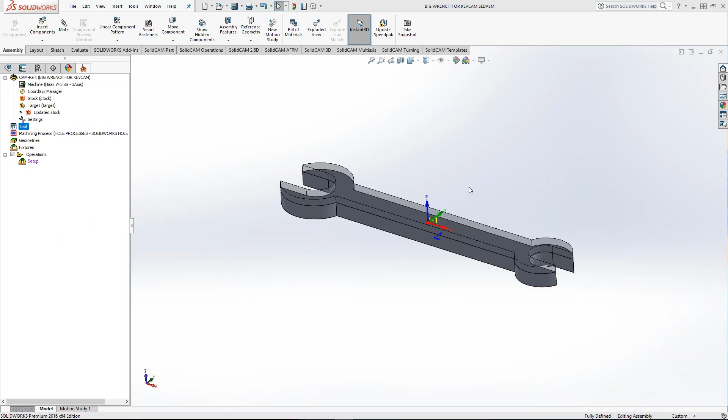Okay. So I didn't really want to face a square part, so I thought I'd come up with something a little funner, so I made up a big wrench. Added some stock to it, added a couple nubs to mill off on the back here. Of course, the standard setup, I think we've all been through this.

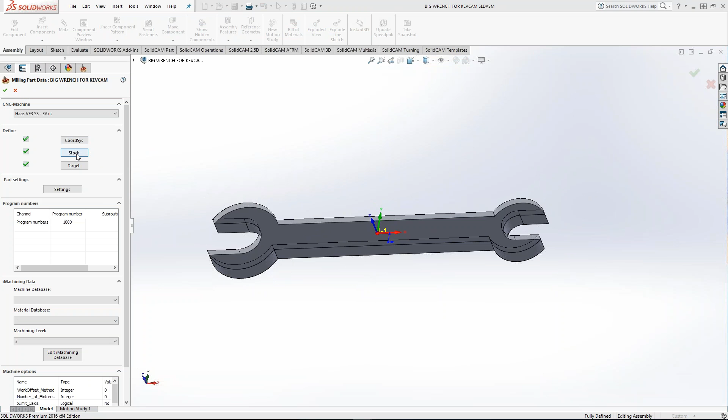This is kind of a different class. You set up your coordinate system. You define your stock. I like to model my stock up. You guys all know that. Target, of course, we've selected that. And today we're not going to be doing iMachining, so I'm not going to use iMachining.

And let me delete this probing. Kevin had asked me to do a probing operation on here, but I'm just going to skip that. That could be a different class as well. See if I can delete this guy now. Okay, so we're all starting from scratch. Got a coordinate system on here.

And there's a lot of things going on with face milling, to be honest. Back when I first started with SolidCAM, there was no face milling module. We either had to use profile or pocket and then manipulate the toolpaths to do what we wanted to. So in my opinion, I consider face milling what I call a canned operation, like the toolbox cycles, made easy for the user.

They're always open geometries, so you're not going to get a face mill operation to go up against the wall. In order to do that, you're going to have to use a profile strategy or a pocketing strategy. But there are very cool things going on with face milling.

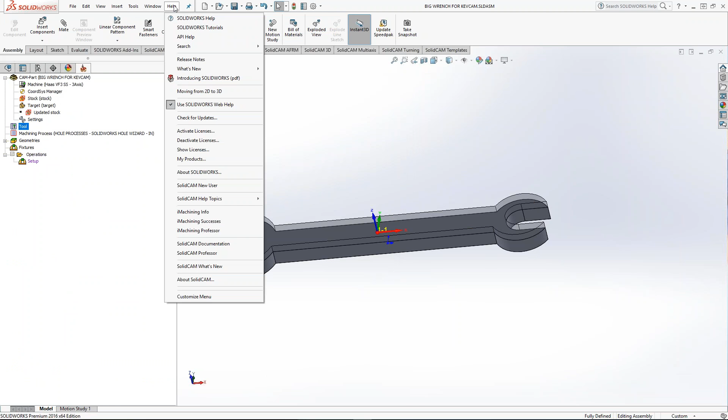One thing to keep in mind, and it's very helpful for even us application engineers at SolidCAM, is the help menu. The help menu covers every topic that there is in SolidCAM. So if you ever have a question, and I can show you guys how to get there, you just go to help. And if we go to SolidCAM help topics, we're going to go to milling.

And then what you do in here is you type in a phrase. Say we type in face milling. Then you're going to go ahead and select list topics. You're going to find a topic and you're going to display that topic.

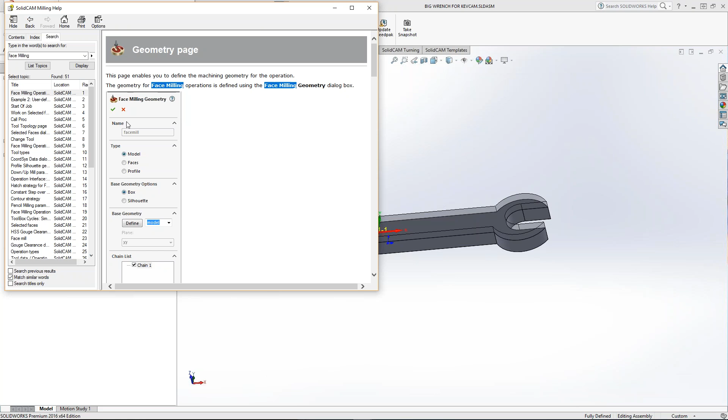And this is kind of how I set up the class because I've been working with the software maybe 6, 7, maybe 8 years. As a customer, probably 4 years, and now I've been on board about 4 years. I'm still learning things every single day with this software. And a lot of that is just right here in the help menu. And it's really simple to get to.

And so I come in here and I start looking at how geometries are created, and I start reading, and I start seeing things like, oh, okay, wait, you can do a box and you can do a silhouette? That's really cool. So if I had something with a hole in the middle here, select silhouette, and it's going to avoid cutting all that air in the middle.

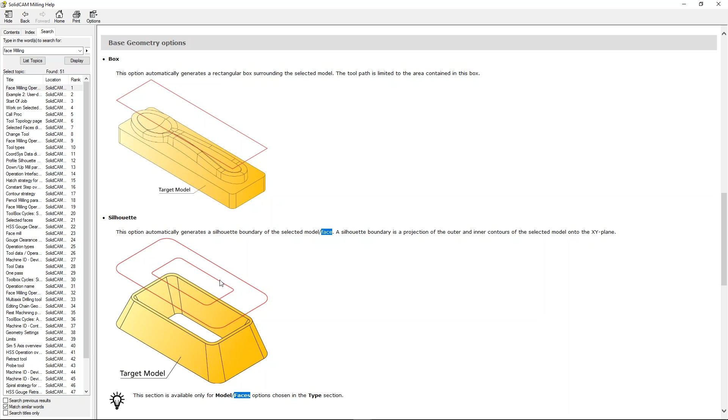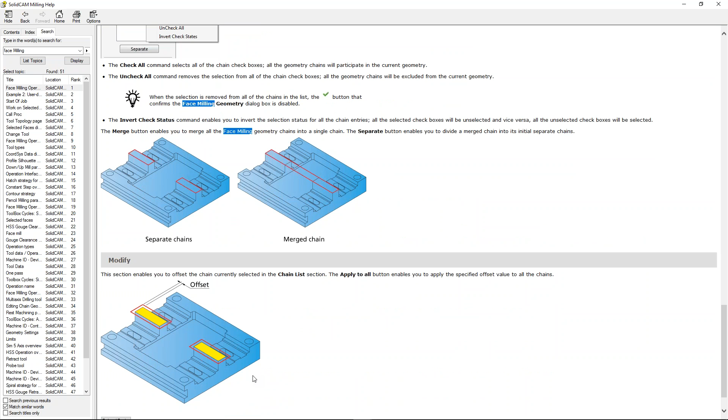Other things too, like you can actually join two bosses together. So separate chains, merge chains. I just learned that today, just going right to the help menu. These things are really cool. Some things we take for granted, but really these operations are very powerful, even something as simple as face milling. Modifying the offset just like we do in a pocket or a profile. So we're going to cover these things on the fly.

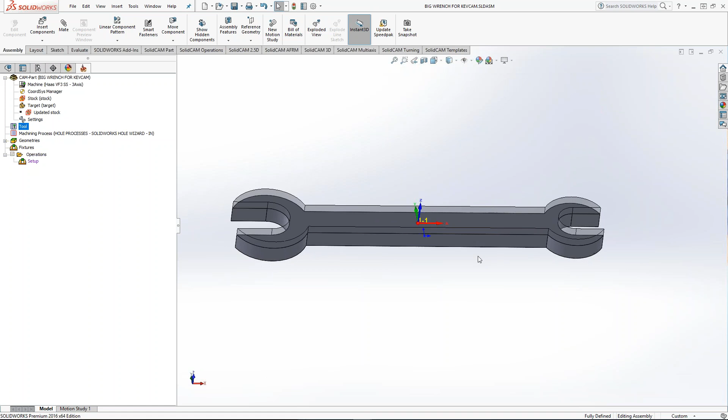I thought a box would be kind of boring, so I drew up a real big wrench. So let's say we get a really big wrench, a forging, but we have to machine it down so it needs to fit in the slot or something. So we need to take all this stock off.

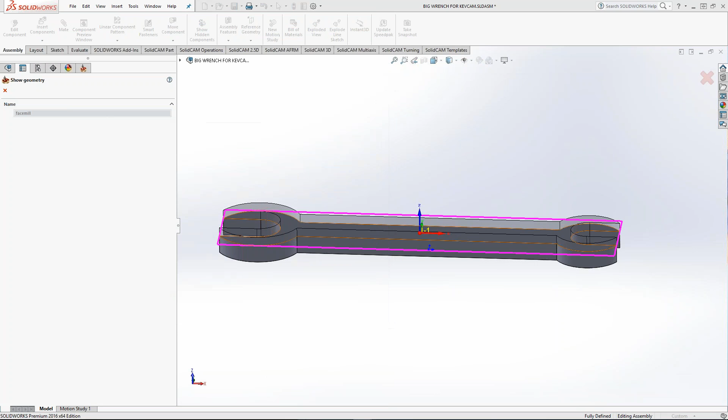So we're going to go ahead and add our facing operation. Now, this is kind of neat. I don't know if this is what SolidCAM is doing now or not. I need to investigate this, but keep in mind I'm working in 2016, but it's automatically popping up this automatic box here for the face mill, so it would face it off.

But I'm going to go ahead and create my own. It's really neat. That's cool, Justin. I think that's a 2016 feature that it's actually grabbing the minimum extents box and creating that geometry for you on the fly when you start your project. It must be doing that. Exactly. That's exactly what it's doing.

So now with this wrench, we got 3 options that are pretty much going to give you the same result. And the reason for that is because we don't have a lot of complex geometry. For instance, if we had a part that had a lot of different levels that was very prismatic, well, then you might want to just select the model, click the model, and then it'll put a silhouette around it. And then you could either select box or silhouette. You could select individual faces, or you can chain profiles.

All 3 of these tools are just tools to get you the geometry you need from any part. And in this case, all 3 of these options are going to give us the same result. But again, if I had slots cut out of here, surfaces, weird things going on, you might be limited to one of these, like for instance, a profile or a face or the entire model. So they're just different animals of getting what you need. So let's start off with model.

Now, this is one thing that gets me to this day, and it gets all of my customers: this is the only operation where you're ever going to have to click things twice in the geometry field. So first you're going to select how you want to get the geometry under type, and then you're going to select define. It would be nice if these were just a button. I could probably put that in as a feature request, but in this case you're going to have to click it twice. And even as I was trying to prep for the demo, I kept slipping up and not hitting the define. So this time we're going to start off with model, and we're going to select define.

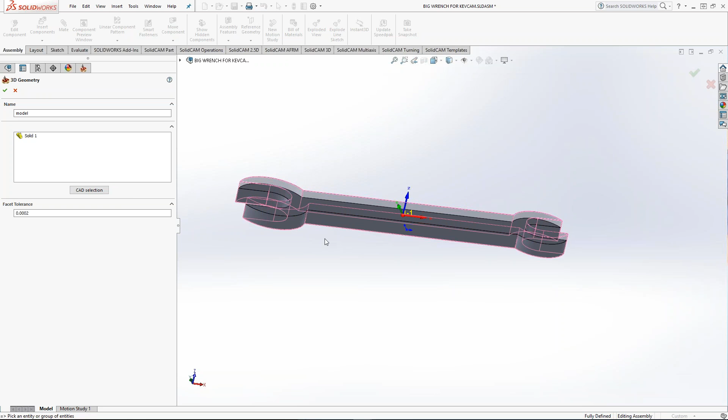Then that puts us into our 3D geometry. So you have your CAD selection where you can either pull out of your tree and get individual models if you're working in assemblies, or you can just go ahead and select the 3D model. In this case, I want to select the stock or the target, and it'll give you the same result, but typically you would want to select the stock because you're removing the face of the stock. So we're going to accept that. And now because I selected box, it's going to give me the automatic box.

I could do silhouette as well. Again, with faces, I can do box or silhouette. This time, let's do silhouette. And then define. And then we're going to select a face. I'll select my stock face. And it's going to give me a profile.

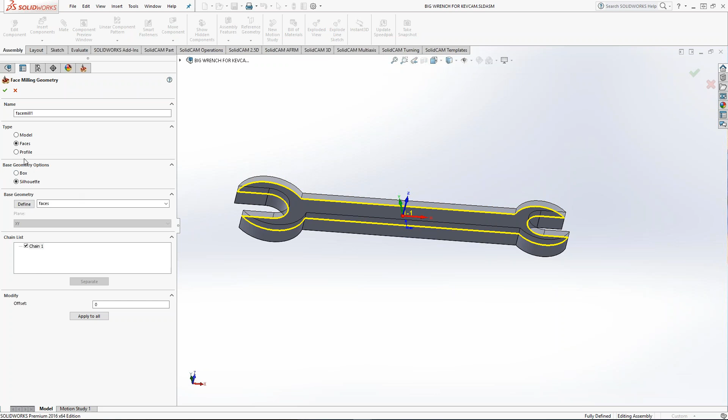Same thing with profile. Like I said, we're going to get the same result 3 times with this because the geometry is so basic. But if I do profile this time, let's mix it up a little bit. Let's see if it'll give me a box. Maybe it won't. I'll go and do my constant Z propagation here. Chain it all the way around. And what do I get? Just profile. So we're restricted to profile within profile. So we don't get either box or silhouette.

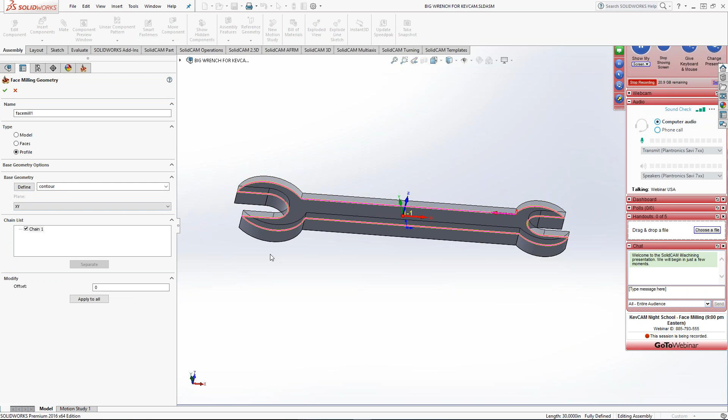So good to know. In this case, I'm going to go ahead and avoid cutting air, because this is actually a very big part. This is a big wrench. And just to kind of measure it here, if I do an evaluation, just to give you the scale of this. This is a 5-inch. This is a 10-inch. So inside here, this is for a very big wrench. So we got a 5-inch wrench here.

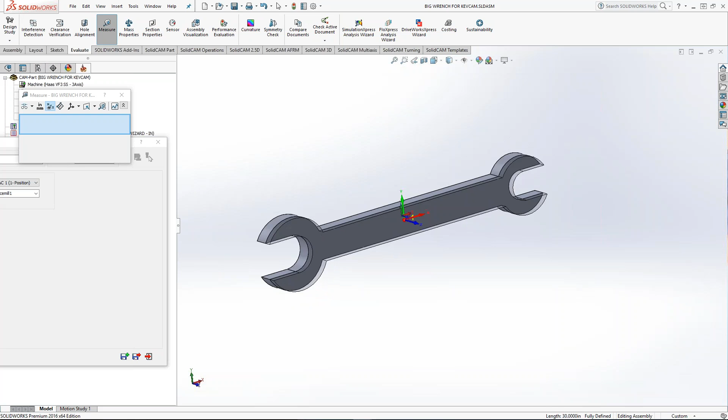So obviously a 2-inch face mill is going to be relatively small, or it's going to be removing a lot of material. So in that case, I want to try to avoid cutting air by doing the box and cutting outside here. I want to try to eliminate that. So now let's go ahead and select a tool. I think a lot of you know how to import the tool, but I'm gonna go ahead and do this on the fly. I'm gonna do a face mill.

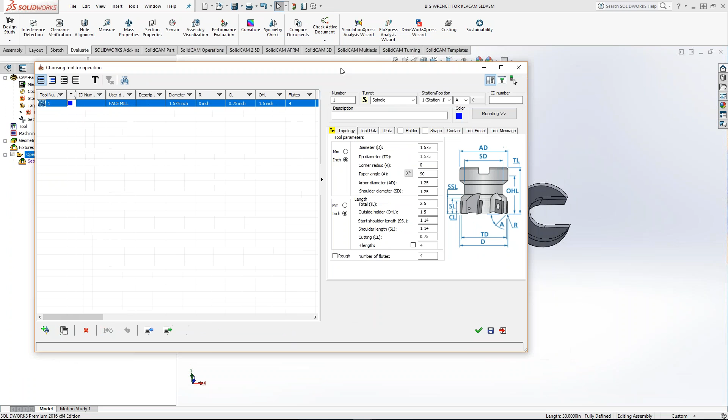And I'm gonna pick the picture here, and let's build a face mill that looks more like what we have out on our shop. So typically face mills are about 3 inches in diameter. So that's 3 inches from here and here. And if you look at any of these fields right here, you see D reflects the outside.

We'll go ahead and do all inserts have a radius. Typically they have anywhere from 8 to 15 thou. For a lot of roughing, you want a robust insert, so maybe a big radius on there. 90-degree is not good for carbon steel. 90-degree shoulder mills are only really good for aluminum or shouldering.

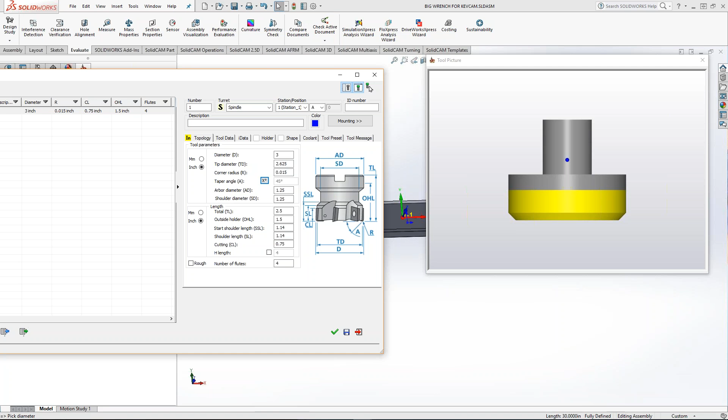So typically, if you go to your tool manufacturer, they're going to try to recommend something that's probably like at a 45-degree angle. And that's going to kind of create a chip thinning effect, and it's going to actually help the insert. What's neat, and I noticed this button here, I think this just kind of locks that in right there. I think that's pretty cool. So you can't mess it up. Arbor diameter. Let's do a 2.5 arbor diameter. So it's starting to look more like a face mill.

Let me get this out of the way. And you guys forgive me, this is my first time with GoToWebinar, so I'm going to kind of fumble around with that as well. So let me see if I can minimize this back. There we go. I got more of a screen now.

Shoulder diameter. So that's the inner section of this here. So we'll go ahead and we'll make that probably about 2 inches. Now it's starting to look even better. Total length, okay, so this would go to your Cat 40 holder. Typically, the Cat 40 holder has a lock nut right here. You lock that in, and then the total length would come from that Cat 40 holder here.

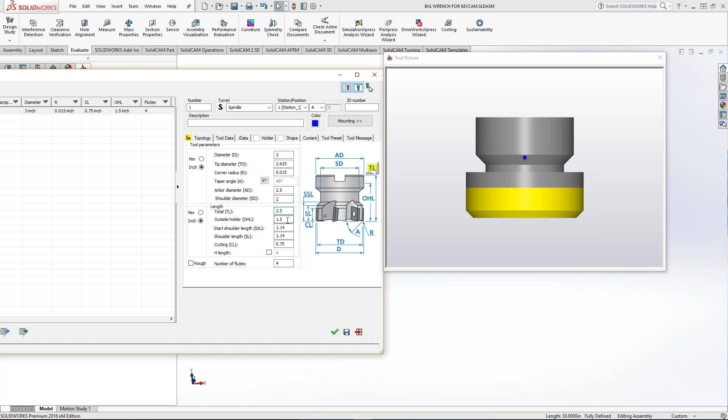And this could be important because we have the capability in 2016 to gouge check against the Cat 40 holder in 3D iMachining and in HSR. So if you need to dig that tool into a deep cavity, these parameters are very important. Okay. So outside of the holder, we're going to probably want to do 2 inches. Shoulder length, this is second shoulder length, this is shoulder length. So it kind of gives you this little taper right here.

But first I'm going to go to the cutting length because the cutting length is very, very important when you're face milling. Tool manufacturers will recommend that you never go past the insert screw. So even though your insert might be a ½ inch deep, you don't want to go past that insert screw because then you're going to cause vibration and maybe cause that insert to come loose. So typically what I'll do with this cutting length is I'll put it to my insert screw. So just kind of guesstimating, maybe that would be about 250 thousandths. Don't need 2 decimal places. Okay.

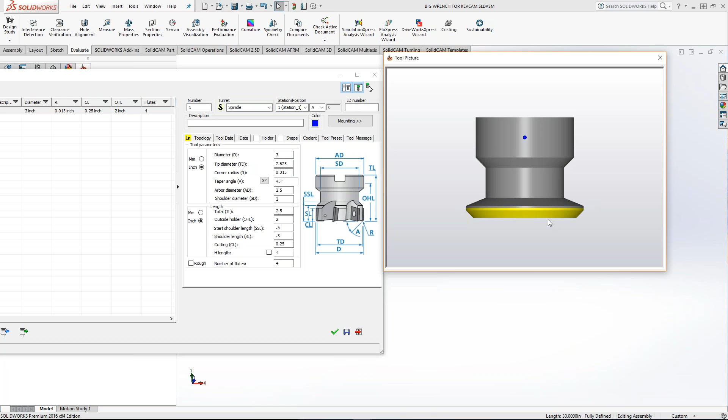Now we're looking at shoulder length. Shoulder length should just be a little bit above that. Okay, and then my second shoulder length doesn't need to be that big as well. Now we have something that looks like a nice face mill. So we'll go ahead and accept that. We'll give it a name as well. So we'll call this my 3 inch.

And you guys, it's always important to put something in this field because you'll get blank parentheses if you don't. And I always stress in all my training that you fill out all of this tool data correctly right from the get-go. That way, anytime you grab this tool, that information is already in there. And also, if you make a library out of this tool, that information is already there. So you might as well do it right the first time. So we're going to call this 3 inch, 45 degree face mill, something like that. Okay. Now we're going to go into our tool data.

Now, face milling is actually just as effective as iMachining in certain ways because what you can do is you can take a very wide step over rather than a very deep cut. And you could also run very, very fast. So if you're cutting like carbon steel or stainless steel, you can actually run these inserts dry and run them at phenomenal speeds and feeds, maybe 800, 700 surface feet, and just rip through material.

What's happening with a face mill is what is called an interruptive cut. So every time the insert comes into a cut and leaves a cut, it's heating and cooling. So by leaving that coolant off, only with carbon materials and stainless steels, you're actually keeping the insert happy. It's actually cooling itself as it's doing the interruptive cut. Now with aluminum, you would always want to run coolant. You won't get away with that. But with carbon steels and stainless steels, it's very happy to cut dry.

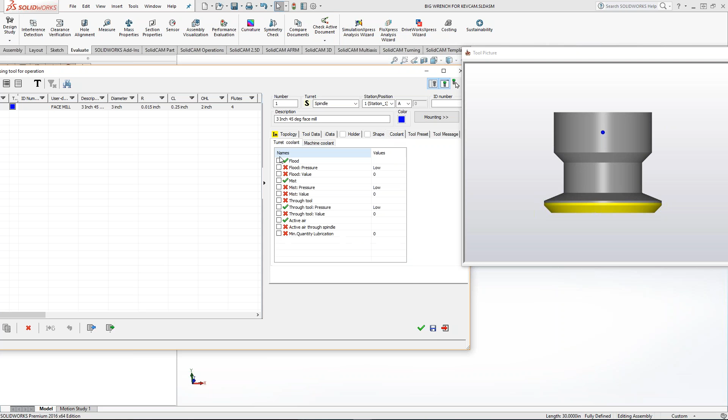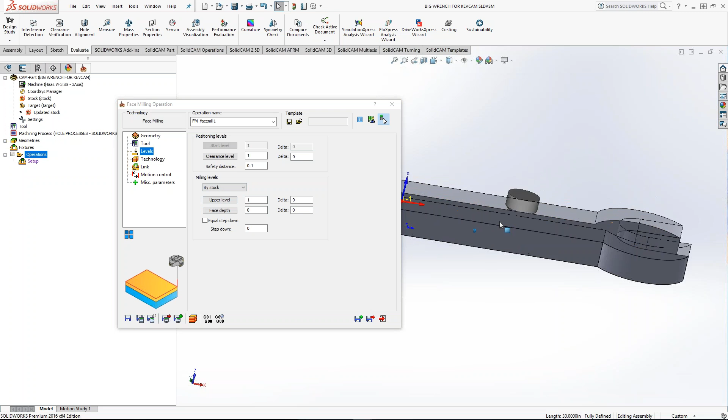Okay, so now we're going to go ahead, and we don't need to necessarily add a holder unless we're going into a deep cavity, and then also your coolant on here as well. So we'll go ahead and do that. Okay, levels. Another new feature here in 2016 is our milling levels. And you can actually do your levels automatically by stock or target or user defined. So if I go ahead and click by stock, it automatically puts in my upper level, so it knows where my stock is. Now look at my coordinate system. It's actually on the face.

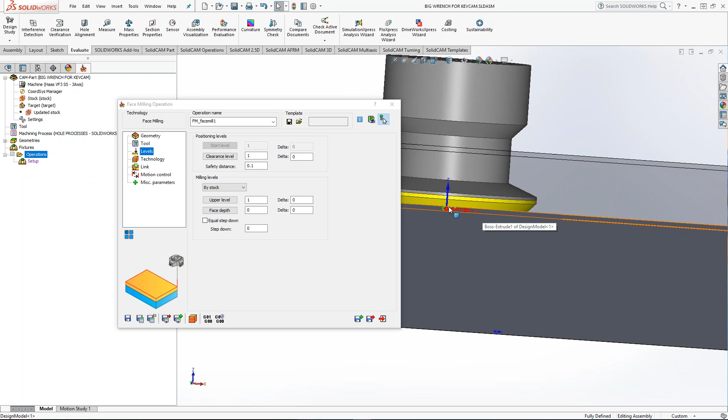And I'm glad that I brought that up because as a machinist, I like to remove positive material and cut it away. That way when I'm on the face, that's 0. So all this would be positive material. So rather than put my coordinate system on the top and then guess where this Z0 is, I like to do it the other way around. I like to find the Z0 and then cut the positive material off the top. That's just my personal preference. So now I'll go ahead and pick a step down, so 200 thousandths.

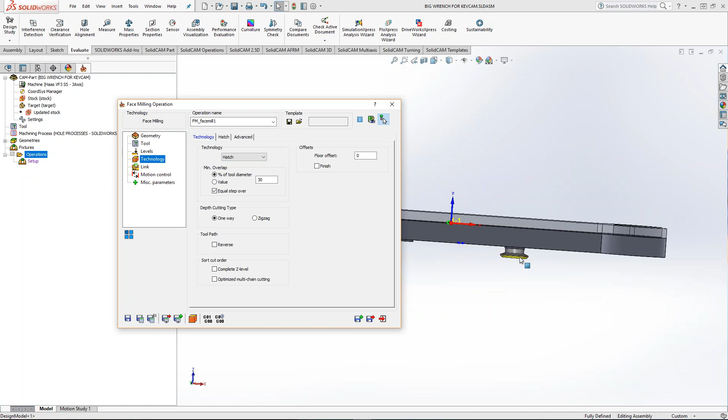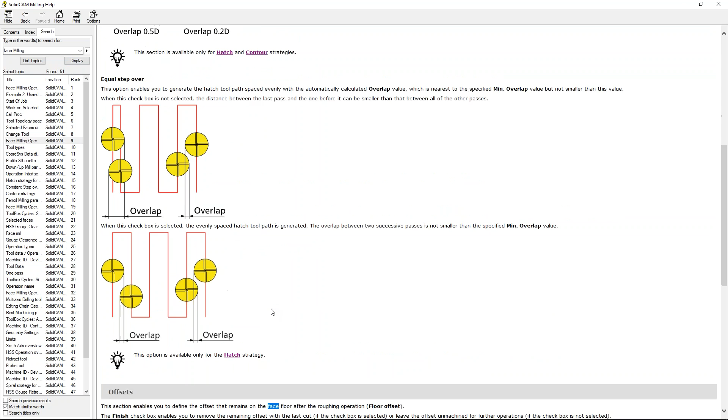Technology. Now here's where everything gets kind of fun. You got all kinds of different options in here how to attack a part like this. Obviously, for face milling, there's going to be a lot of air cutting here. You got your hatch, your contour, your one pass, and your spiral. Now, just to go back to our help menu, I think it's face milling operation display, you get those options right here. You got face milling, linear, contours, one pass, and spiral. So any information you guys need is right inside here. How to use it and all the tricks.

Now for this part, spiral is not going to be good. Hatch or contour is probably going to be what we're going to do. If we had a wide enough tool, we might get away with it in one pass. So let's look at the options between hatch and contour. So first we'll go into hatch. This is an important field, and it's important also in our pocketing operation: minimum overlap. Minimum overlap to me is kind of opposite of the way we think in the shop. We would think of overlap, but I guess it really doesn't matter. But in SolidCAM it's minimum overlap. So that means that if I'm 30% minimum, I'm 70% engaged.

That's the heaviest. Typically, tool manufacturers are going to want you to stay off the center of the tool. That's bad news for the tool. So they're going to say you're going to be 70% radially engaged, which is the max, or 30% radially engaged, which is the minimum. So this is opposite. This minimum would give me 70% radial engagement. You can also do a value. You can see that's 0.9. You have one way, zigzag. I would never conventional cut with a face mill. Toolpath reverse just switches it around, pretty cool.

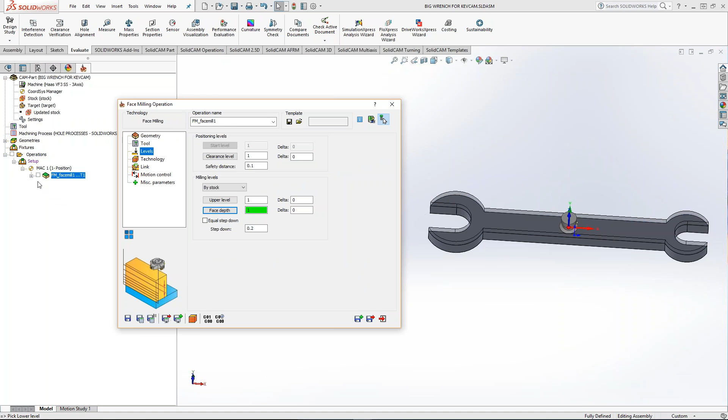There we go. Let's look at the wireframe. So it's going straight up, straight across, back and forth, here, here. We might like that.

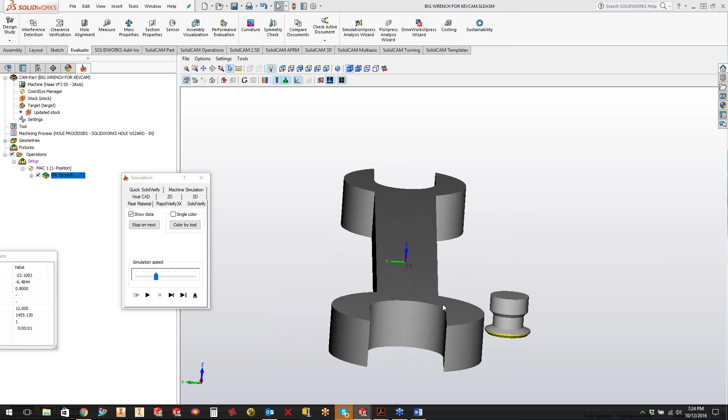Let's take a look. With face milling, it's always important to watch that first move because you never want to plunge with your face mill. So I always do that first step down and look at it go across. Boom, boom, boom, boom, boom. Actually, it looks pretty good. I like it.

It has a nice finish pass as well. It looks good.

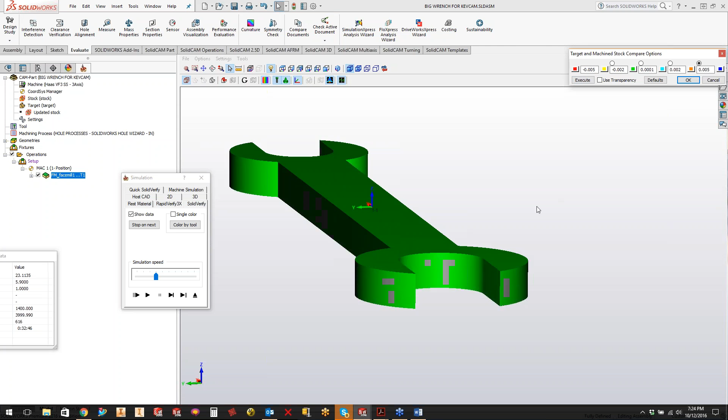Okay, but let's look at some of the other strategies for this particular part. Let's try contour. Maybe that'll cut less air. Using the same parameters, let's see what we get.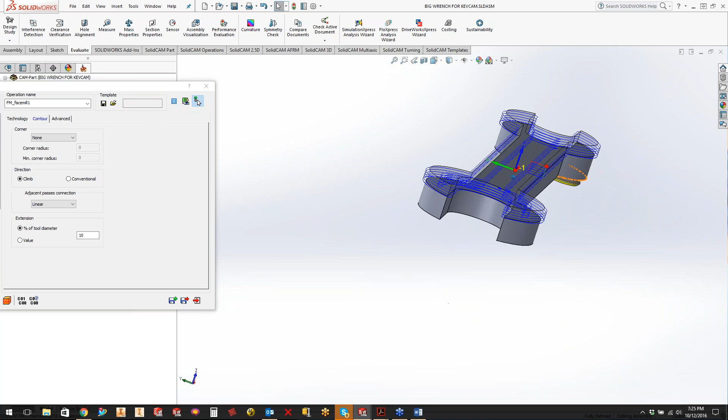Okay, that looks nice, but I'm noticing one thing here. Looks like I'm plunging into the part, so let's figure out why. Oh yeah, plunging right on the part. So obviously I'm seeing that it's taking the center line of the tool.

But I like this tool path better because it's cutting way less air. So let's just get it to drop outside.

This is pretty cool. You can actually make a fillet or a loop. Hopefully you guys - I'm trying to point down here, but if I point down here it switches the picture - but you can see you can do a loop. You can make it sharp on the corners, or none, and just make them straight.

Direction type - this one is really important. I really find that the rounded entry kind of just helps wiggle that tool into the next cut. Smooth kind of does the same thing. When it goes to that next pass, rather than going straight in, it kind of eases into it, more like a lead in, or kind of an iMachining type deal, where it's actually just helping that chip thickness stay nice and clean.

You don't want to slam your tool in 90-degree increments. It always is a bad situation. So let's look at the extension here. The extension says the tool path's going to extend outside that. I don't think that's going to help me. So I'm going to have to go into my links here and go ahead and do a normal or an arc.

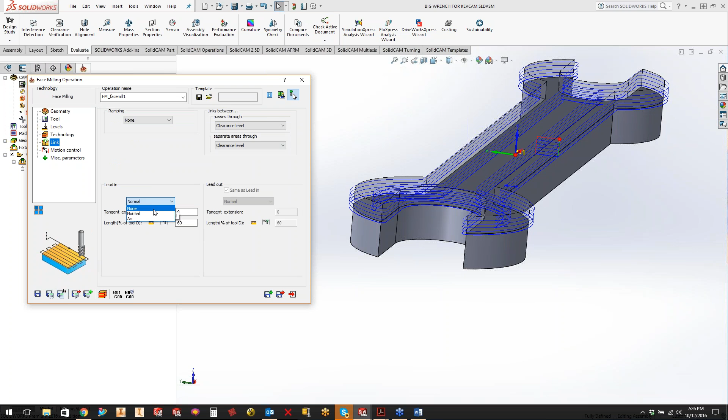There's an arc there. Now I got it dropping down and around. 60% of the tool - that's 10% past.

Now that's a very optimized tool path. So let's look at that run.

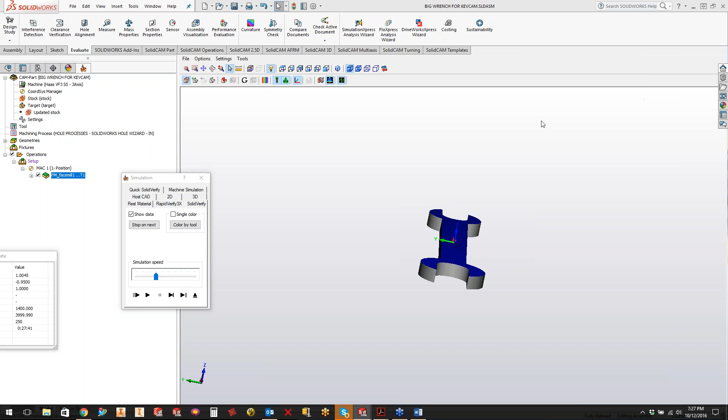I like that one over hatch. I think it's cleaner, less air time, and it might even give us a better finish, kind of a cool finish on the end. Now the other one here, let's go back to our technology, is one pass.

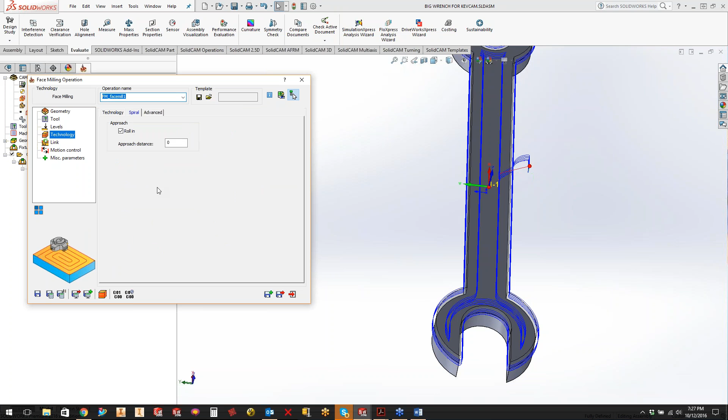Obviously one pass is not going to work on this because the tool will not go over it in one pass, so you're going to get a poor result. And the other one is spiral. I don't think spiral is a good one for this one as well.

But let's look and see what happens. Okay, so it tries to make a spiral, but really it's kind of funky. The geometry is just not good for a spiral.

But I would like to show you when spiral is very effective, and that would be on a square part. So I'm going to go ahead and switch over to my standard demo part.

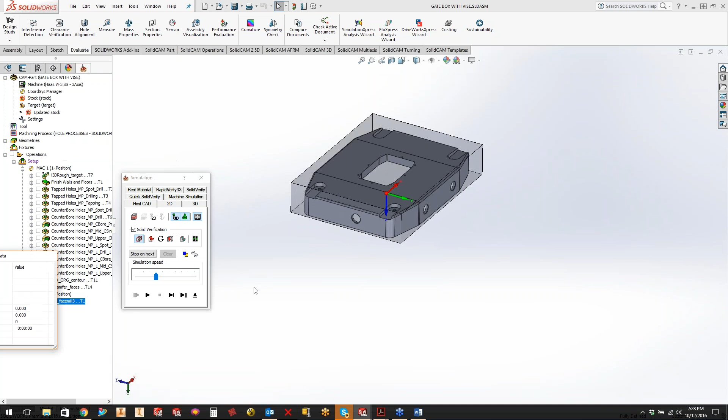I'm going to go into the gate box, and on the second operation here, I already set this up, I want to show you something. On the first operation, we've completed everything and we got some really big rest material out of here.

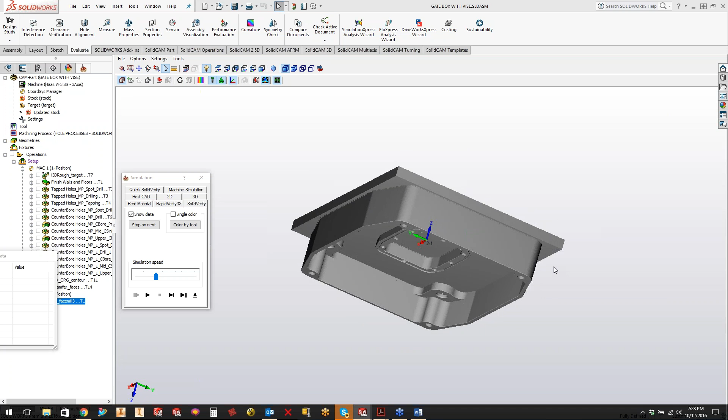And I've had this happen to me in the past, and it is very scary, when you take a chunk of aluminum or a chunk of steel or any material you're cutting and you throw it across your machine using a face mill. The reason is because you come straight across, and as the end mill is coming across, it breaks a little piece right here. That end mill catches it and just slams it across the machine. Very dangerous, can break your tool, and can even really hurt someone.

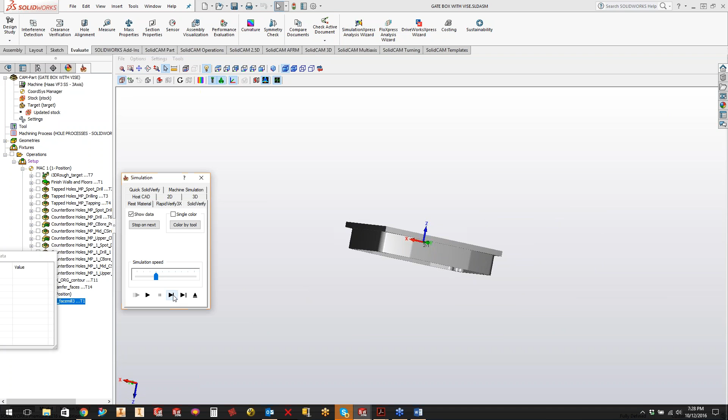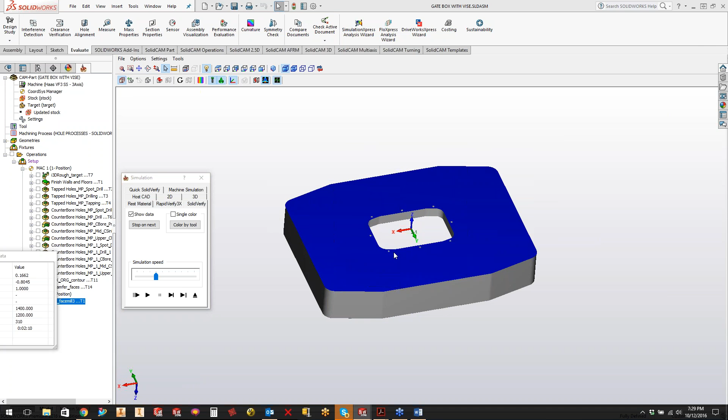So in my opinion, when you have big pieces hanging off like this, you want to use your spiral technique. That'll come in and slowly spiral it around, so there's no chunks flying around. That is my opinion. The purpose of spiral is to be able to get those ears or big rest material chunks and not just knock them across the machine.

All right, we'll go back to our wrench here. Okay, let's see if we're missing any other parameters. We have our linking. I think a lot of us understand what linking is, our lead ins and lead outs. You have your links between passes, you can either go up to clearance level or up to your safety distance. Pretty simple, no need for any of these options here. These are all advanced options.

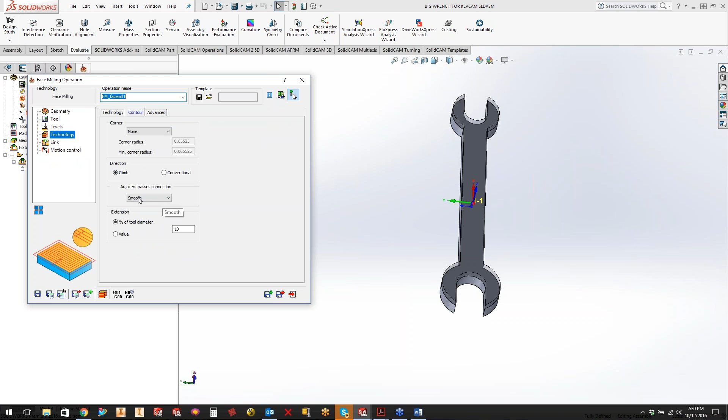So I think we all agree that spiral is not going to work. One pass would work great if the tool were big enough, but in this case it's not. So I think contour is the winner here. We have our smooth adjacent connections, so I think we have the best tool path for this part.

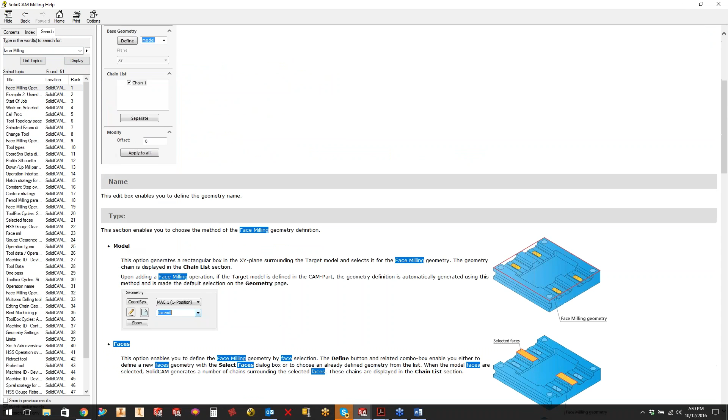Now, there was one other thing I was looking at in the help menu, and that wasn't under this. It was this guy right here, separate chains and merge chains. When I saw this, I was like, what the heck? I can't believe I didn't know about this.

This is totally awesome. And obviously the offsets work very well too. If you need to offset the chain for whatever reason, you have the offset ability, so we should look at that.

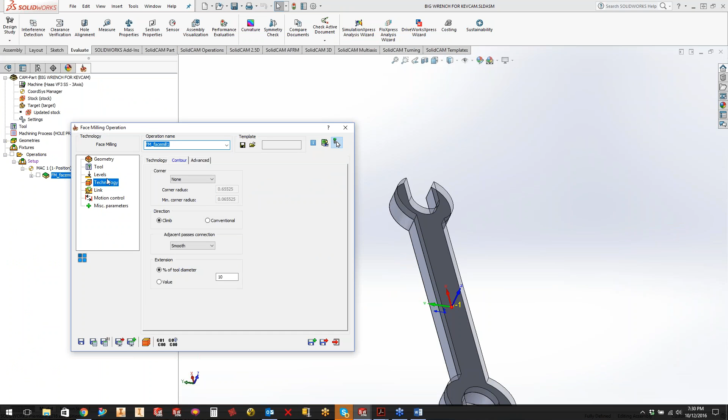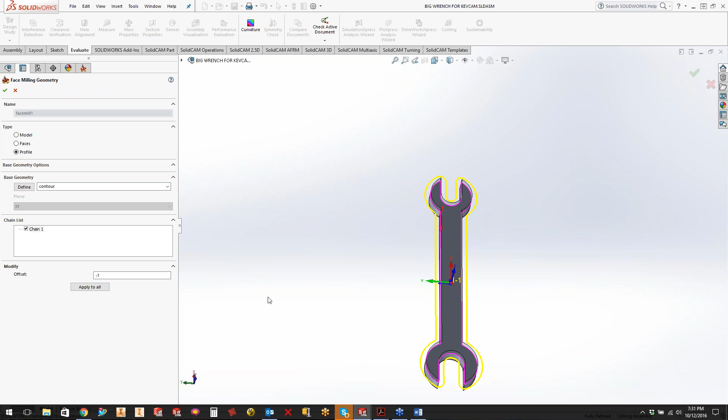Well, actually it's in the chain, just like you would in profile. So you got modify offset. If I go ahead and modify it, for whatever reason you need to modify it, the option's there. Modify it bigger, smaller, whatever you need. You just have that ability to modify the offset, just like in profile.

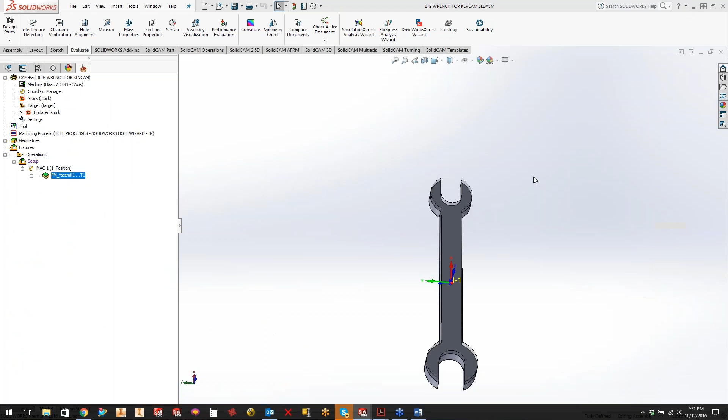But as I was preparing this presentation, I wanted to demonstrate that option I found in the help menu, which was merge chains. There's no chains to merge here, but I've put on 2 nubs.

So we can imagine I got this big wrench. I needed to face it down to change the size, and then also because of the mold or whatnot, they had these 2 little nubs on the back. So let's go ahead and do a second one. This time we'll go to Mac 2, so I have it on the back side.

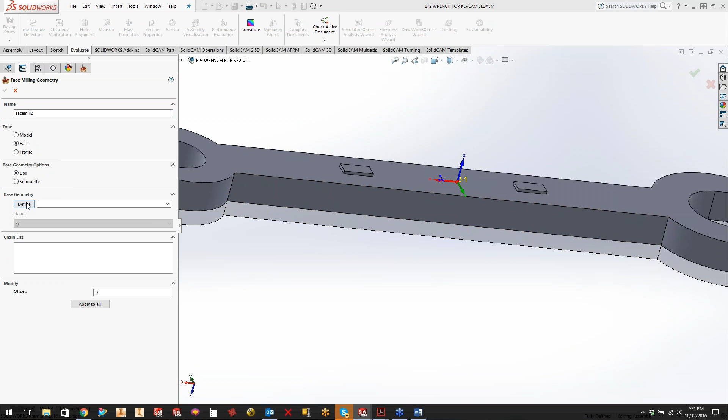And I want to do faces. Define, don't forget to click define, I still do it to this day. I want to cut that face, accept it. Now you have separate or merge.

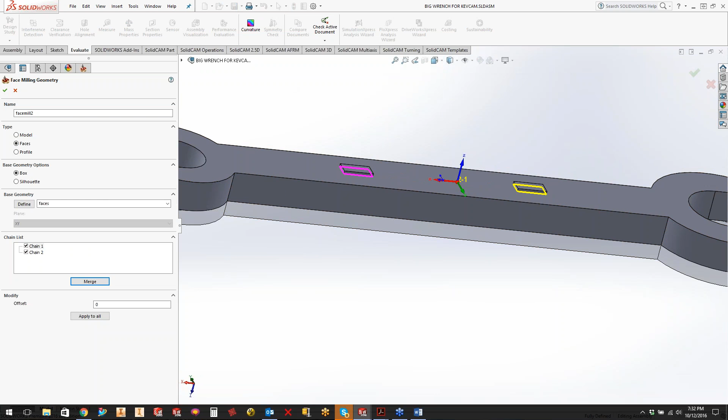Separate, it'll come in, hop up and down, or merge comes down and across. So I'm going to go with merge. Grab the same tool. Now, I could also import a tool from my library, so if you need to come in here and import tools from your face mill, we built one from scratch. I'm actually going to add this to my library, I think it's a nice tool.

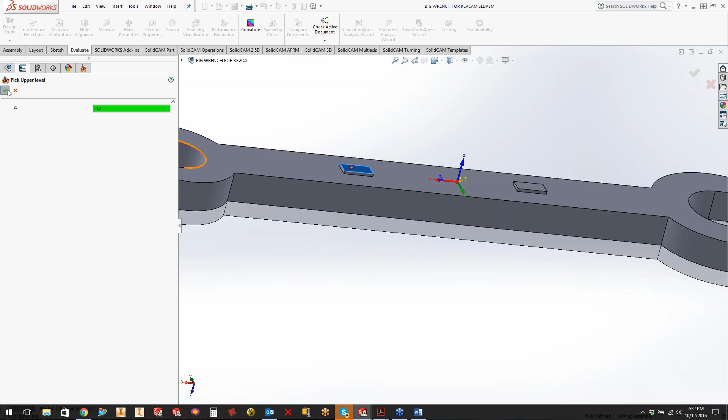Levels by target. This time we'll just do user defined. So I want my upper level of this guy and my face depth down here as well. Okay, step down, I want it to be 0.

I want to cut those nubs off. I'm going to do 1 pass. We have our toolpath modification, so you have your angle, your shift from center.

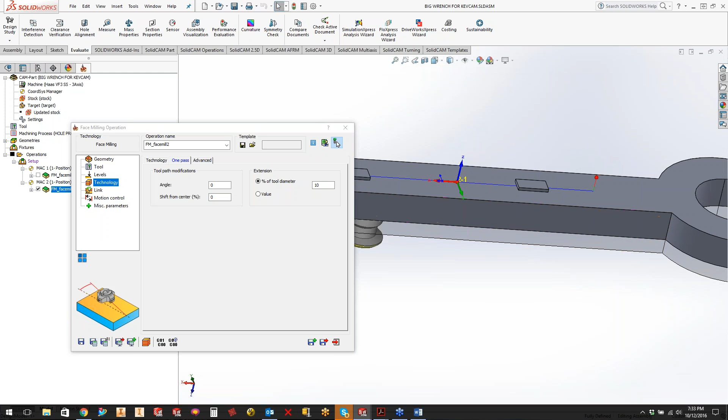This one is important. I had somebody actually just call me the other day about this shift from center. So if we look at the tool path here, let's go ahead and generate it. It's going down the center. If you want to shift it from center, you could actually just shift that whole thing off center.

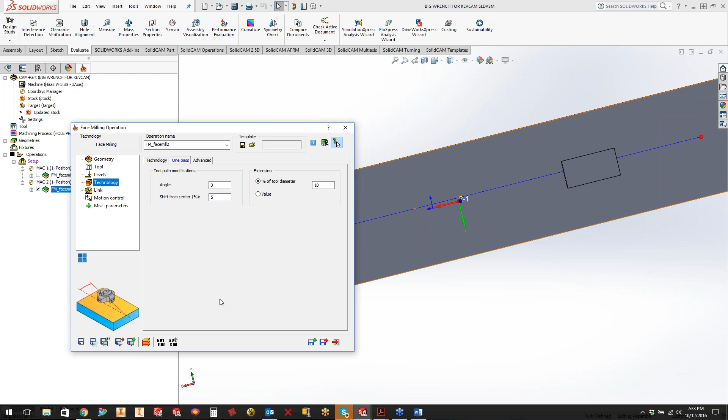See if it works. There it goes. It's working, very very small. Let's shift it. There it goes. May be working in metric. Weird. Oh no, it's percentage. Okay, so we want to do 50%.

There we go. So 50% shift off center or 0. Angle, haven't played with this. Anxious to see what happens here. Totally kicks it off at an angle.

Save and calculate that. Extension of the tool diameter. So it's going to be the tool diameter plus this, so you're safe at 10%. One pass, I like that. Don't need it in the lead in and lead outs. It's automatically at tangent.

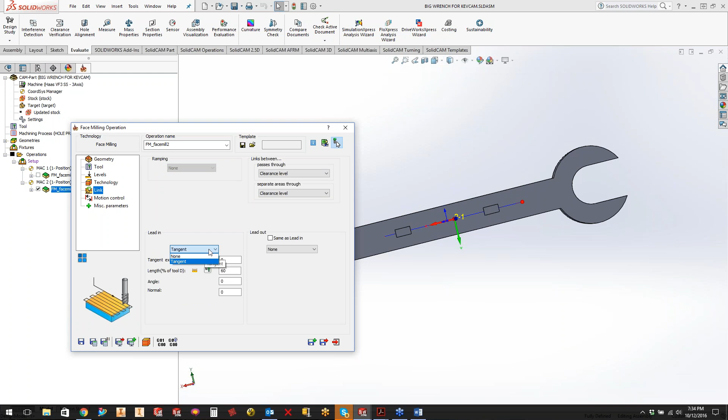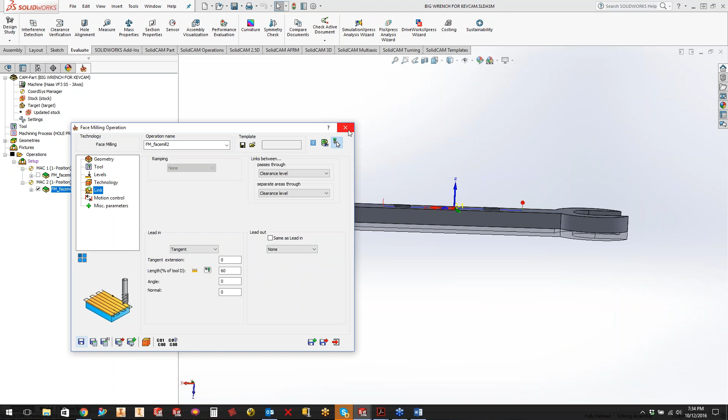I'm going to come in here, drop the tool down, and we're going to cut those nubs off. Well, they're not part of the stock or a part of the target. Let me go back to my target and let me add in these guys. I didn't merge them, so let me go ahead and just click those guys so we can see them get cut off. Cool. All right, we'll calculate that again, or just I think we should just have to simulate it.

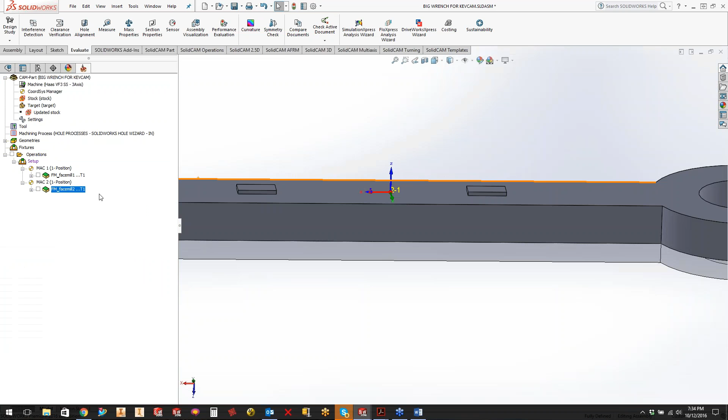Doesn't look like I hit accept. Let me look again. They're on there, I just can't barely see them. Why am I not seeing them on here?

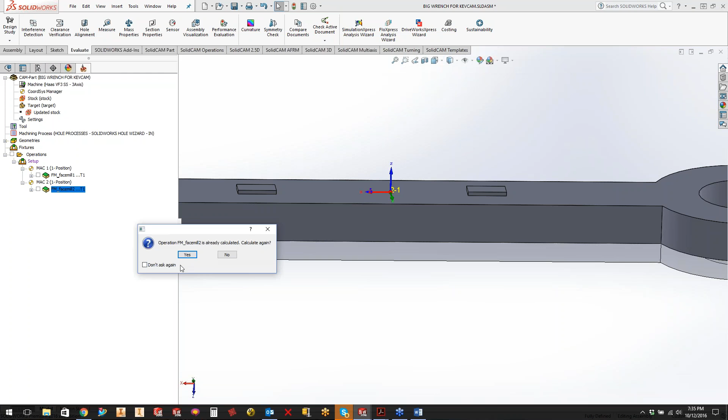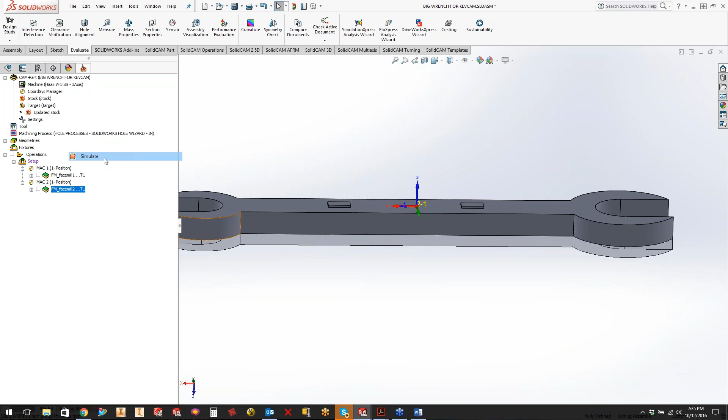For whatever reason today they're not showing up. I'll have to figure that out. Maybe because I did them after the fact. Doesn't matter, let's do a post verification here. Nonetheless, we can see them getting cut off. Try to do a cleanup cam part.

Your updated stock looks like it's got an asterisk on it, doesn't it? Yeah, it does. Maybe that's the new button that works. Tim's right on the money. Look at that, that's amazing.

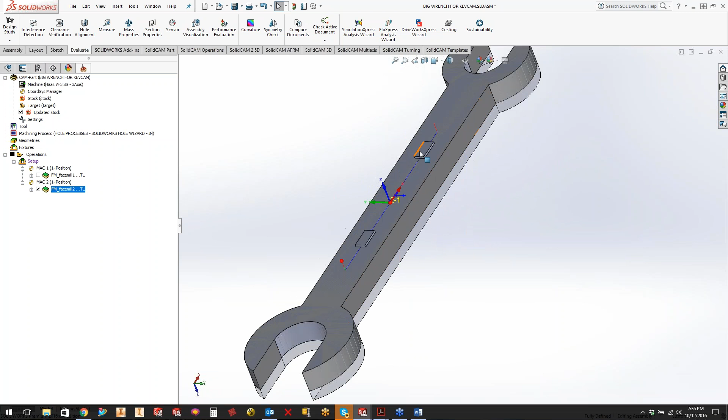Well, they're still not showing up in my Solid Verify. Yeah, not a big deal, I'll figure that out. I think everybody kind of gets the idea of what you're doing there. But anyways, the main point was that we cut the nubs off, click the two faces, and merge the chains together.

I think one last thing here. This is going to kind of be a little bit of a short class tonight because we don't have a lot to cover. As I mentioned earlier, and I don't know if you guys heard it or not because I was muted for a while or I wasn't broadcasting, but in the early days of SolidCAM, there was no face mill.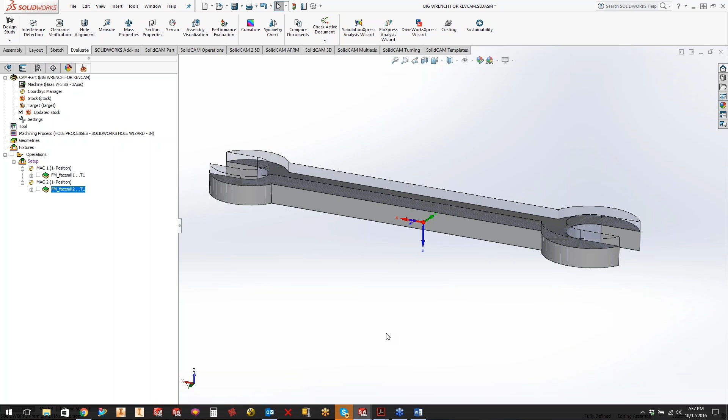It's kind of a canned operation to make things easier. So what we would have to do is either use profile or pocket. And sometimes if we want to go up against the shoulder or things like that, we need to use those options still to this day. Just a quick example of how we would do that.

I'll just use Mac 1 here. Oops. So we'll do a pocketing operation. I can even borrow that geometry from the face mill operation. Or maybe not, because I want to be able to reverse it. So let's go ahead and do a new one.

That's climb cutting. That's another thing too, is that it doesn't matter how you create your chain in face - you can either climb cut or conventional cut. In a pocketing strategy or a profile strategy, you don't have that option. You're going to have to make that chain go the same direction. So I want to go this way, so I'm climb cutting.

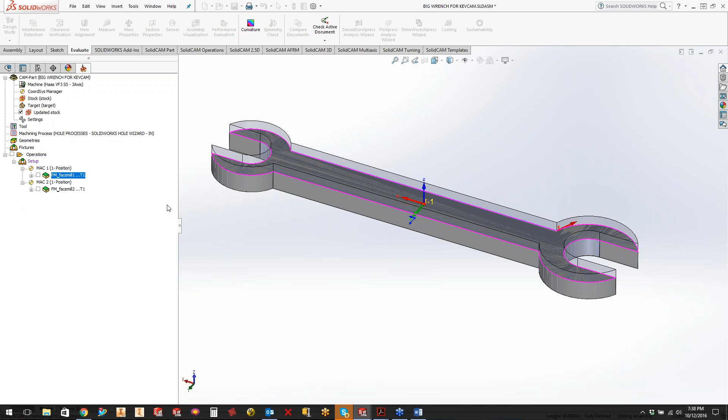Again, grab my tool. Again, do my levels, same concept. Pocket depth, step down, we'll do 0.2. Technology - here it looks kind of the same, doesn't it? You have hatch or contour.

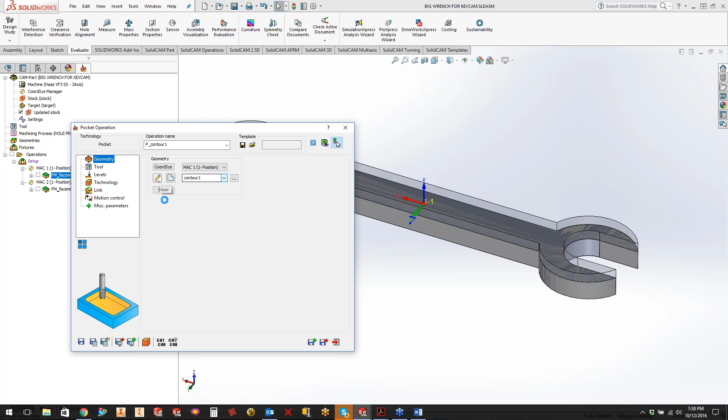Kind of neat, but the thing is now is that my geometry is closed. So if I do hatch or contour, it's going to shove that tool in here. So I have to come in here, edit this, and I have to make it open. You don't have to do that in face mill. So I have to mark the chain as open. Now the tool can fall outside. So there's a lot more things I have to do here in Pocket to make it work the same.

We want to stay off the tool center line, so we'll do 30%. Now that I have open pocket selected, this open pocket tab shows up. Again, very important - as soon as I click that chain as open, this new tab shows up. It's important to know that. If you're going to do contour or hatch, we're going to do the contour. We'll use profile strategy, and we'll approach from outside. Here's my extension, we'll do my links - a link, an arc in and an arc out. Let's see what we get.

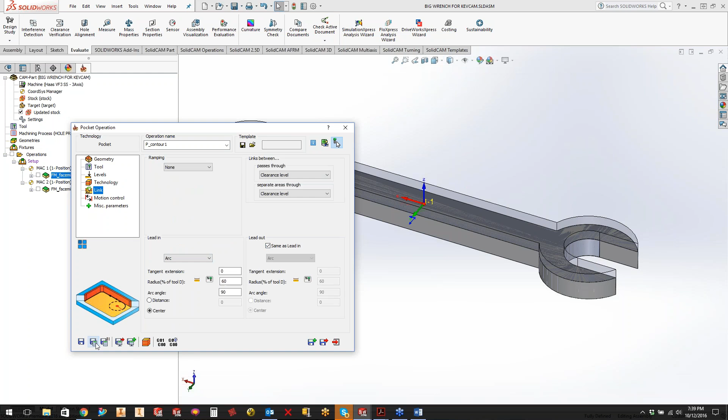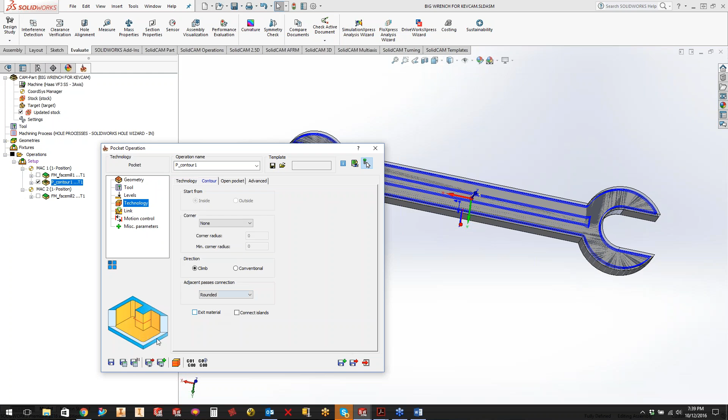I have something that looks pretty similar to this. So if I go ahead and refine this further, let's look at our adjacent passes, and let's do a rounded one. Getting pretty close, not identical, but pretty close. So that's how I would do it in the past.

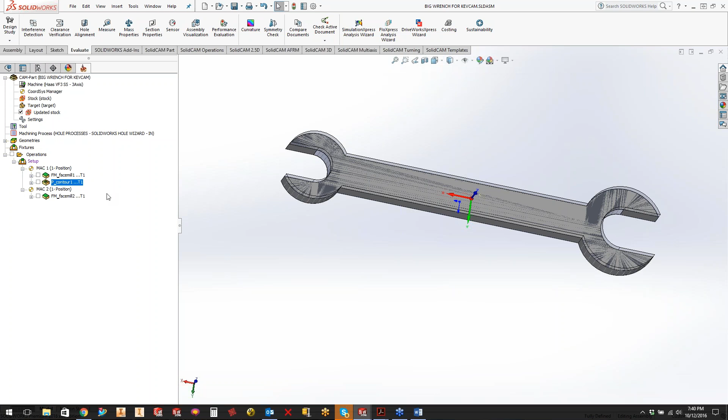Yep, and it's a good point, Justin. The face milling operation, I think that came about in the 2007-2008 timeframe - that's back in the day when I was supporting the software. But if you're trying to do a facing operation and not able to get it exactly the way you want, you can use the pocketing or profiling operations to do the same thing. Exactly, because it does the same thing - you don't have to use the face milling operation. Those other operations are another way to do it with a few more options. The face milling operation came along to make it easier for the user for doing those shallow depth cuts.

And profile as well. Back in the day, there was no engraving - I would do all my 4th axis, all my 5-axis engraving with profile. I would just chain it, and it would be tool on center line, and it would do the profile. Kind of the same situation.

I think that's all I got, you guys. I hope you enjoyed me being here in place of Kevin. Again, Kevin's out farming, feeding America - I think that's really cool. Actually, I tried to get a hold of Kevin earlier, and I seen he was online, so I pinged him, and sure enough he showed up, and he had his webcam on - he's driving around in his tractor.

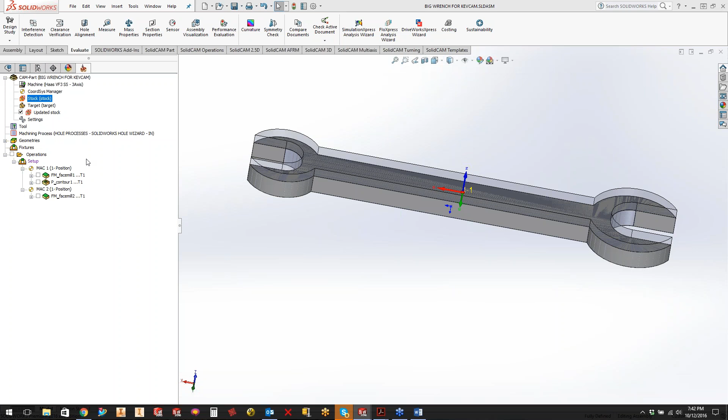Anybody have any questions about what you've seen? I noticed there hasn't been a lot of questions, but is there anything Justin can answer while we got him online for a few more minutes? Well, one of them was for Rodney, to actually make these nubs part of your stock. I think I'm going to do that - I think that was a good idea, rather than the target. Yeah, that's a good point.

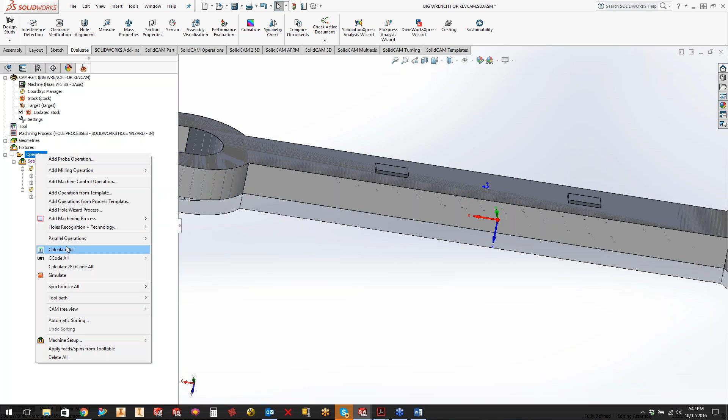So now if we go to simulate this - and there they are. Thanks, Rodney. Yep, nice call. Now I get to see the nubs get cut off.

Synchronize - thanks, Justin, very nice class. I enjoyed KevCAM. Thanks, Rick. We like the comments there. Any other questions, you guys? Just go ahead and ping them in now if you have any.